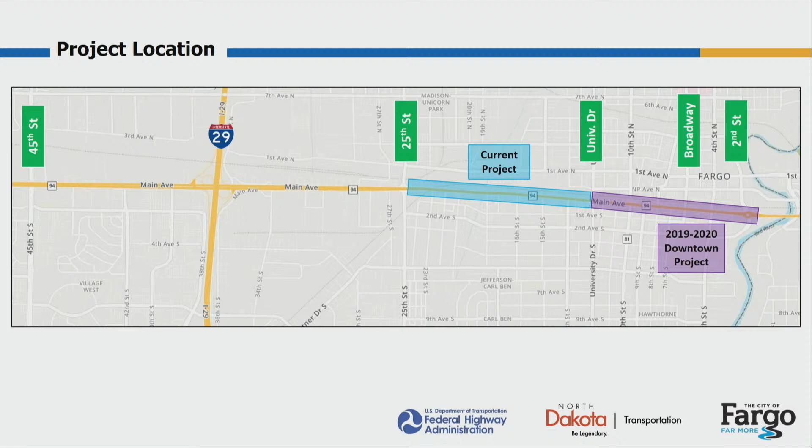I'm not going to spend too much on this slide because I think everybody knows where the project is, but just to highlight that there's 4 miles of Main Avenue, which is also US Highway 10, within the city of Fargo. This is really the last mile that hasn't been touched within the last 10 or 20 years. So this is an important project that has been needed for a while due to some of the needs that are out there. And in purple, the downtown project, which most of you are familiar with, was done just a few years ago as well.

As we look at those 4 miles, one of the interesting things about this corridor in Fargo is how much it changes from one side to the other. West of our project area, between 45th Street and 25th Street, we have a 6-lane section, with 3 lanes each direction. We've got dedicated left turn lanes, sometimes right turn lanes as well. But then when we look to the east, with the project that was just rebuilt a couple of years ago, that section changes from a 5-lane section down to a 4-lane and ultimately a 3-lane as you approach the roundabout at 2nd Street. So this context of the surrounding corridor definitely played into our alternative development with this project.

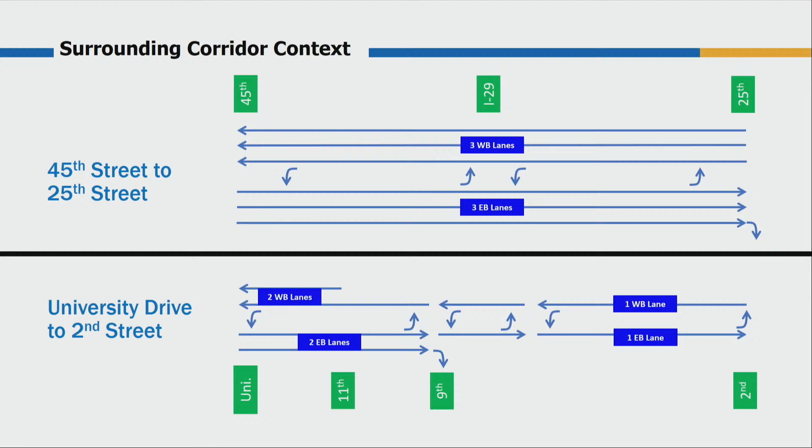The other thing that has been interesting, or challenging, with this corridor is the narrow right-of-way that we have between 17th Street and University Drive. We only have 60 feet of right-of-way available to fit what we're trying to do in that area. And as you can see on the screen, sometimes that 60 feet is literally between building face to building face. So that obviously constrains some of the things that we're able to do as well.

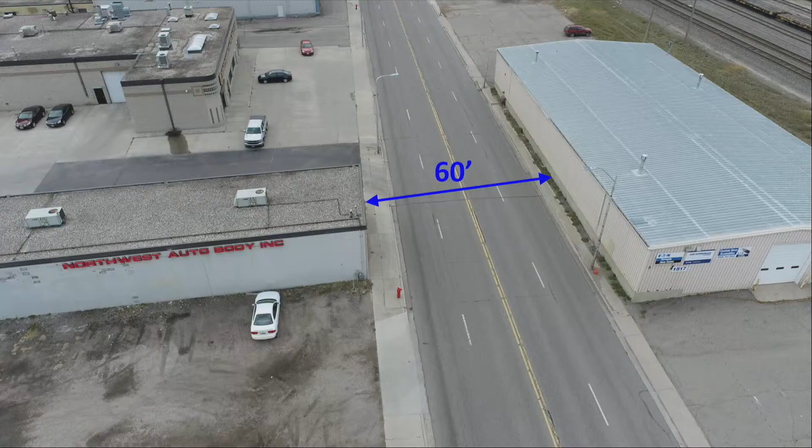Those of you that were here last year, this slide is essentially the same. One of the first things we do on these projects is really work with our team to develop the purpose and need for the project, our why, as far as why we're doing the project.

These bullets really boil down our purpose and need pretty well. A couple to highlight here: bullet number 2, improving the pedestrian environment, has been really important to the project team from day one. I think those of you that have walked out on Main Avenue understand that's something we can definitely improve. The photo on the lower left shows an example of a really tight sidewalk with the building, and the travel lanes right adjacent, with not a lot of room to operate.

And then the photo on the lower right—the other thing we really looked at with this corridor is trying to close and consolidate access. I think there's about 80 driveways within this 1 mile stretch of Main Avenue. We've met with many of you a few times, and we appreciate everybody's willingness to look at opportunities to close some of those. Jake will talk about that here in a little bit on how we were successful, I think, in trying to do that.

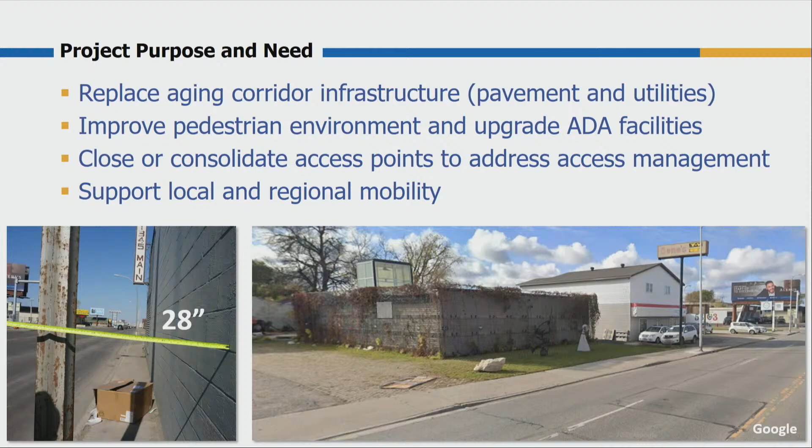On federally funded projects like this, one of the first things we have to do is go through what they call the NEPA process. That stands for the National Environmental Policy Act. It's a process required for federal actions that have federal funding, to make sure we're studying and disclosing any environmental effects or impacts that might come out of what we're trying to do with the project before we make decisions.

There are 3 classes of action for that process. I'll just highlight them here quickly. The first class is called an environmental impact statement. I'd call that the most complex class, where you already know you're going to have significant impacts with what you're doing, so you need to really do a detailed study of what you're looking at.

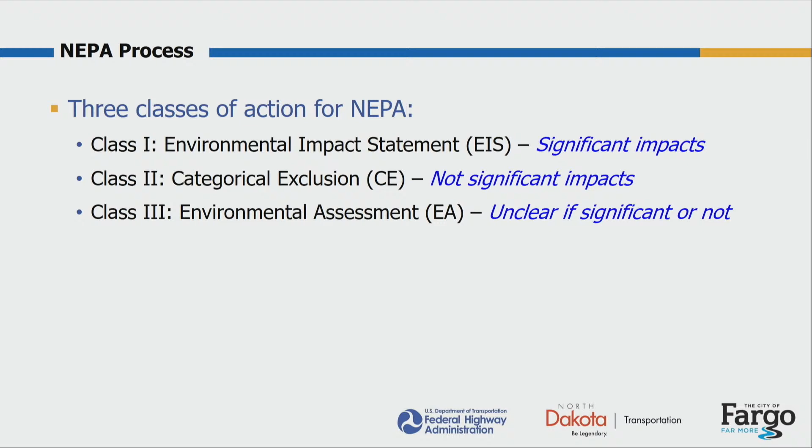Class 2 is called a categorical exclusion. That's probably on the other end of the spectrum—the least complex class, where you're pretty sure you're not going to have significant impacts, so you just start down that track and see where things go. The third class is in between those two: an environmental assessment. That's when you're not really sure if your alternatives or your project is going to have significant impacts or not.

The Main Avenue project we're talking about today started as a class 2 categorical exclusion. When we started the project, we were thinking we're not going to have anything that would elevate to significant impacts. Then as we worked through our alternative development last year, met with a lot of you, and developed our alternatives with our project team, it was determined that because some alternatives impacted buildings and could potentially cause relocations, that definitely would be a significant impact.

So the project team stepped back at that point. We looked at that and said, we need to elevate this environmental process to an environmental assessment so we can look more closely at these impacts. That's really what caused the delay that some of you know about with this project. It added about another year to our project schedule, but I think it's been well worth it because we were able to take that detailed look at some of these things. That's how we got to the environmental assessment.

We started that process in February of this year. FHWA and the DOT were joint lead agencies, with the City of Fargo as a participating agency. We've been working through that, taking a close look at a number of different environmental categories regarding the alternatives and their potential impacts. We made it through that process and were able to get the EA finished and signed by FHWA in late October. So that's why we're here today—now it gets released for public inspection.

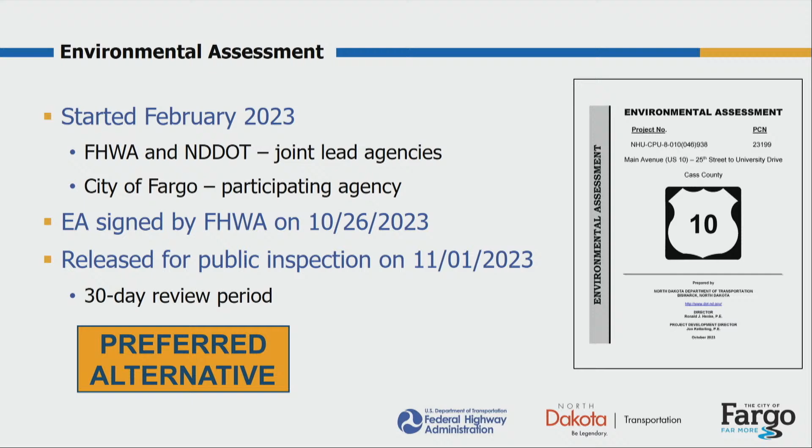So starting to jump into a few of the details here, and then I'll turn it over to Jake for some alternative discussions. One of the first things we had to do with this project is collect traffic data and then figure out how we're going to forecast this data out to 2045, which is our design year. So what we're trying to show in this graph on the left, the year is on the bottom axis, and the vertical axis on the left is the number of vehicles per day, what we'd call ADT, or average daily traffic.

If you focus first on the line that has the blue and the orange, those blue dots represent collected data up until about 2018. So from 2005 to 2018, you can see that's kind of what traffic was doing on Main Avenue—it was growing slowly a little bit every couple of years. That orange line was what we really expected that trend to continue to be as you move forward. But with COVID, of course, everybody knows things kind of changed as far as the way people use a lot of our corridors around town.

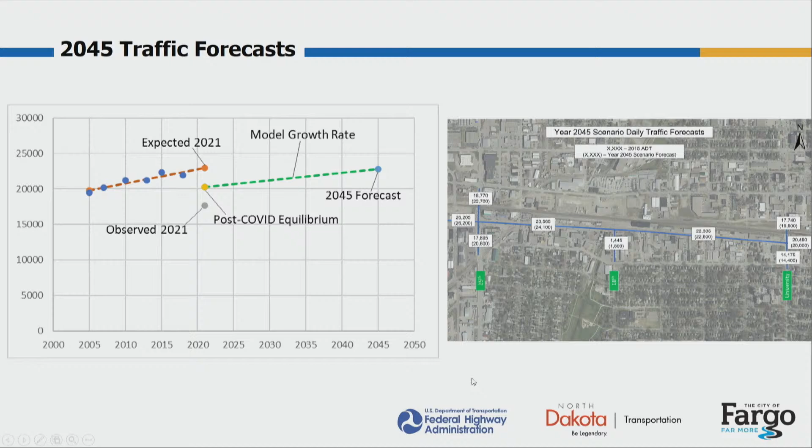So a couple key findings from the traffic analysis: we found that the current through-lane capacity out on the corridor was adequate for that 2045 traffic. We didn't need to add any through lanes to the corridor. In combination with that, as we tested some different lane configurations, we found that we could reduce the lanes east of 18th Street while keeping the same capacity west of 18th Street, and that would still provide an acceptable level of service, or LOS, on the corridor. That really helped inform some of our alternative development as we moved into that part of the project.

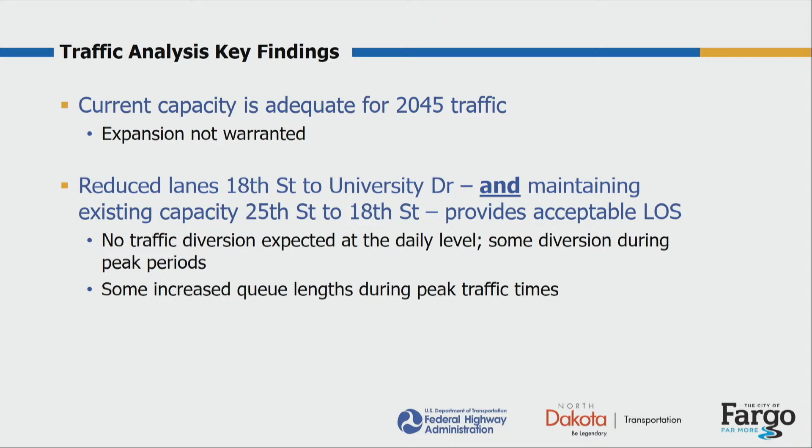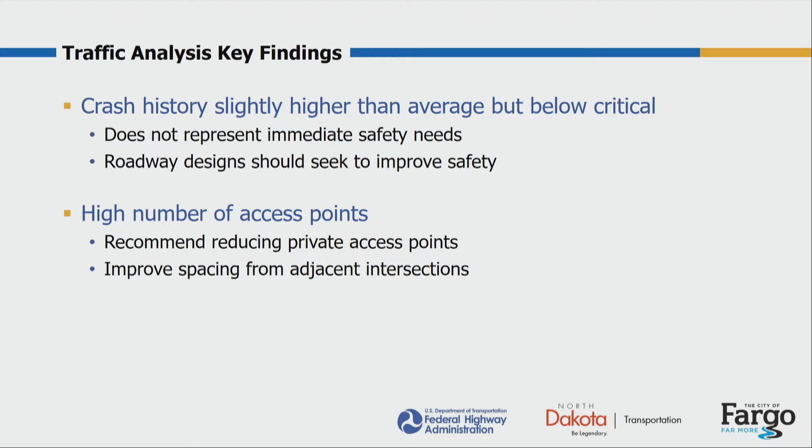All right, thanks Matt. Hello, everyone. Now we're going to talk about the alternative development process, what alternatives were moved forward as part of the environmental document, and really what we're trying to do and achieve with the purpose and need that Matt discussed before was provide some consistency between all the alternatives.

One of them is the segment west of 17th to 25th Street, maintaining that 5-lane section. We determined there was a need there. We have the right-of-way room and capacity to do that. ADA compliance and the improved pedestrian environment with sidewalks, providing a continuous center left turn lane along the entire corridor. Right now, that center left turn lane only exists from 18th Street to 25th Street.

And construct new sidewalk along the entire corridor. Those pedestrian improvements, nearly 8,000 feet of sidewalk will be replaced. Reducing one lane of through traffic in the westbound direction between 17th and University Drive.

And as discussed earlier, that management of those access points. We've talked a lot with the property owners, a lot of you in the room here today, about how we can provide additional safety benefits when it comes to access in and out of properties. And then also as part of this, replacing the storm sewer, sanitary sewer, water main, all those underground utilities with this, as well as improve the lighting.

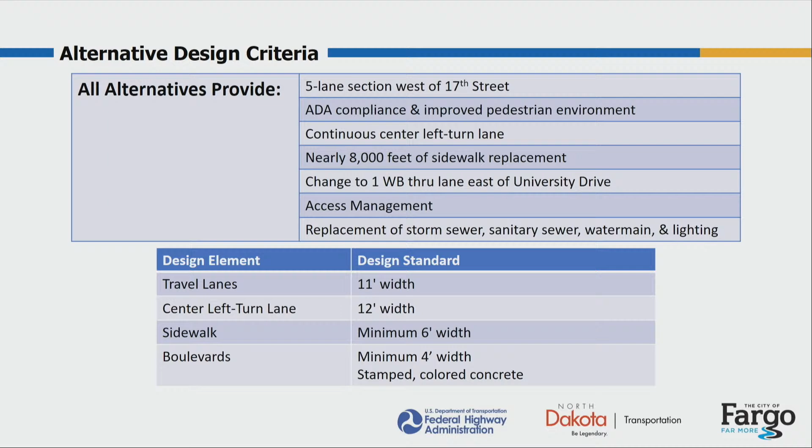So when the project first started, we decided with the changing environment along the corridor with the number of lanes that are currently out there, we decided to split up the corridor into 2 segments: the segment from 23rd Street to 17th Street, and also from 17th to University Drive. For all the alternatives, that segment between 23rd and 17th is going to remain a 5-lane section, and we're just going to improve that section. So really the number of lanes is not going to change between that section, just improvements for pedestrians and other amenities.

Now the segment between 17th Street and University Drive - well, these are where the alternatives are going to be discussed in more detail. Throughout the process, we did determine that one of the alternatives will be removed from consideration because of the amount of impacts it does have, and that was continuing that 5-lane section from the west all the way to University. So that was removed, and it was determined as part of the environmental process to move the following alternatives forward.

We did add an alternative. It's more of a modification of one of the alternatives, and it's really to minimize some of the impacts that alternative originally had.

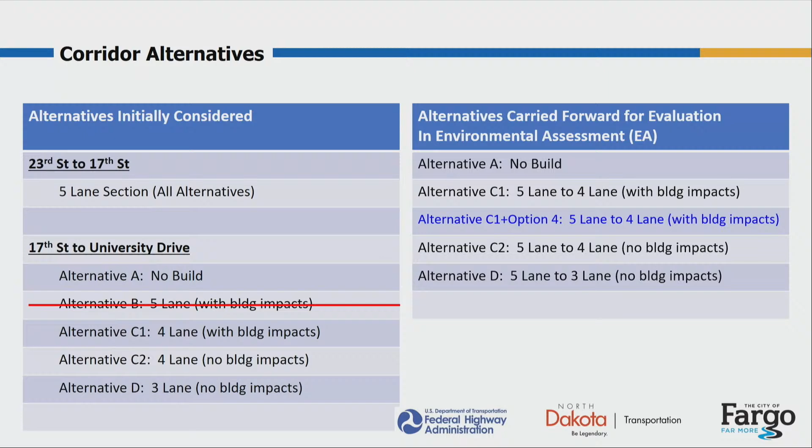So the alternatives that are going to be moving forward through the environmental process: Alternative A is a no-build, basically that is a do-nothing - project doesn't happen, no improvements. Alternative C is a 4-lane alternative. Remember, these are all alternatives between 17th and University.

That 4-lane alternative was broken out into 3 separate sub-alternatives for that 4-lane option: one with building impacts, one with shifting an alignment slightly to the south to avoid some impacts to some buildings, and also modified design criteria that we talked about previously that would eliminate those building impacts. And then lastly, Alternative D was a 3-lane.

We also looked at some options at specific locations along the corridor. Option 1 was widening the sidewalk from 23rd to 25th Street. This would provide some continuity with the sidewalk and the network for bicyclists as well, on the south side of the corridor. Option 2 is to provide a raised median at 17th Street. And option 3 was to reconstruct curb lines with that reduced lane just to the west of University.

What's been recommended by the project team and the stakeholders was to move forward with recommending a preferred alternative of alternative C2, which is the 4-lane with modified design criteria and no building impacts. And then for the options, option 1 with that widened sidewalk at the west end of the project, as well as option 3, reconstructing the curb line just west of University Drive.

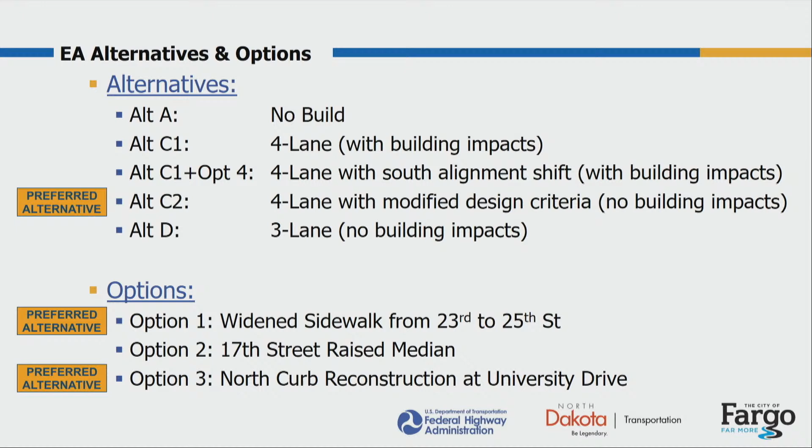So a little bit in detail on the alternatives. Alternative A is a no build. Like I said before, no improvements, the project doesn't happen. No improvements along the entire corridor. We have to move forward with this as an option to consider as we look at all the impacts and evaluation of the alternatives.

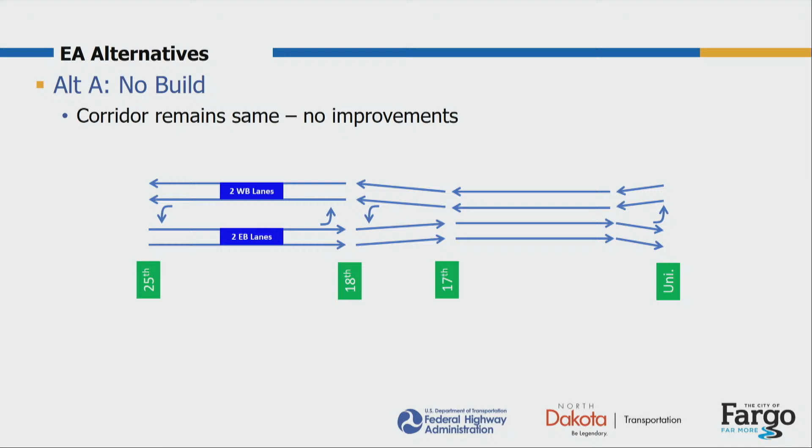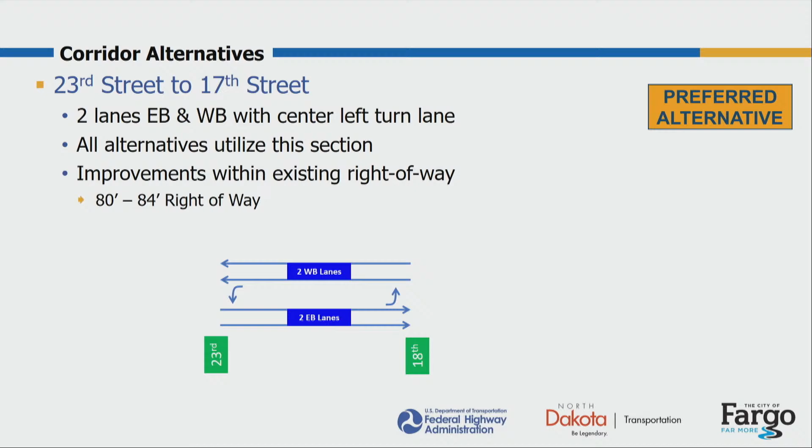The segment between 23rd Street and 17th Street was selected to move forward as a recommendation. This is the only alternative really for this segment, which is to reconstruct the current segment, maintaining those 2 lanes in the eastbound and westbound direction with that center left turn lane. Also, all improvements along this corridor between 23rd and 17th will be constructed within the existing footprint of the right-of-way, so no widening of the existing right-of-way. Here's a cross-section of what that will look like. Again, 5-lane section, widened sidewalk and boulevard improvements, and also some replacing of some amenities, all within the existing right-of-way.

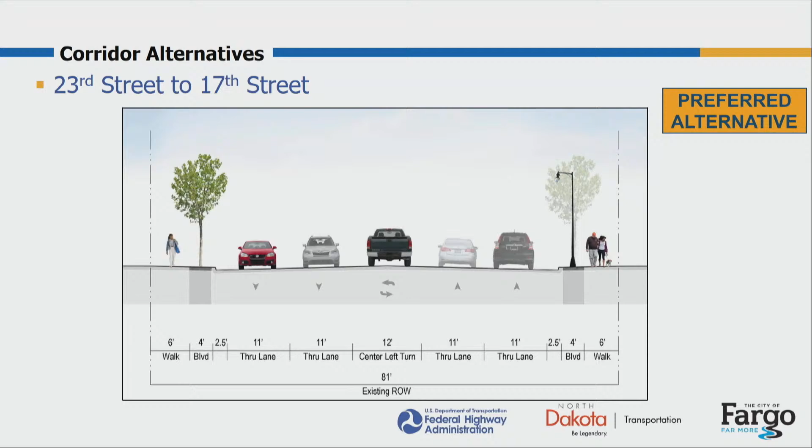We're going to show visualizations of each of these, just a quick snapshot of it, just to get that picture of what it could look like. We do have extended versions of these that go along the entire corridor at the tables there on the monitors, if you wanted to take a closer look at other areas that may not show up on this short clip.

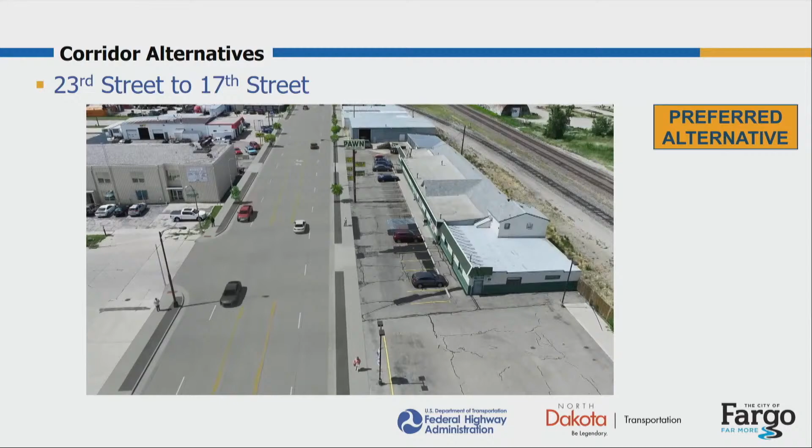So as you can see, around 21st Street here, it's very similar to what it looks like today, with just some of those widened pedestrian improvements and reconstruction of those sidewalks. The roadway will be reconstructed but put back with a 5-lane section.

Alternative C1 - now Alternative C are all 4-lane alternatives, but Alternative C1 is a 4-lane with that ultimate build design criteria, which in turn resulted in building impacts. There will be 2 eastbound lanes, 1 westbound lane, and then that center turn lane. Out there today, there are 4 lanes currently in this segment, but it's 2 lanes in each direction with no center left turn lane. So we're going to take one of those lanes and turn it into a 2-way left turn lane.

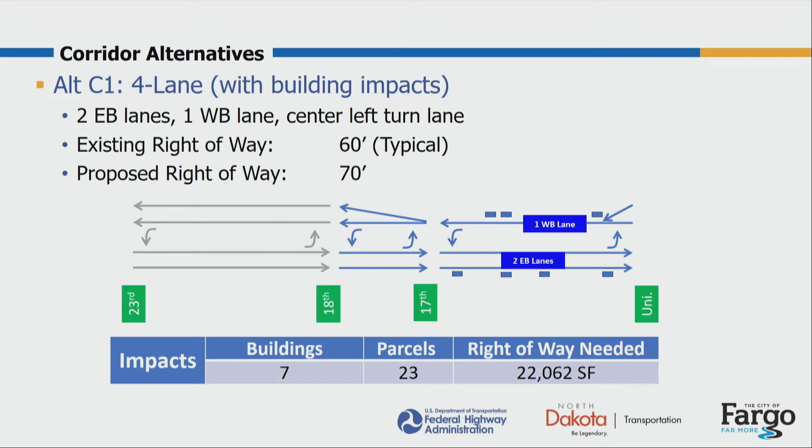Existing right-of-way out there is 60 feet, typically varying plus or minus just a little bit. But with the proposed improvements, with the widened sidewalk and corridor, a new right-of-way width of 70 feet is proposed. With that, there are 7 building impacts, and the right-of-way needed for that additional 5 feet on each side is what we're going to be requiring for additional right-of-way to have that wider footprint.

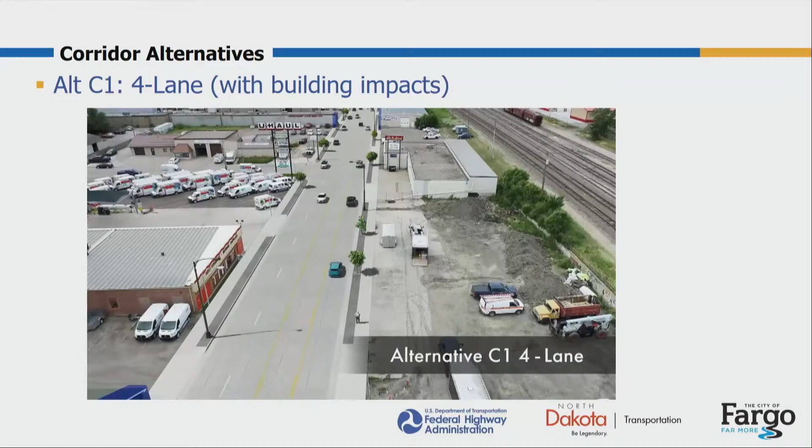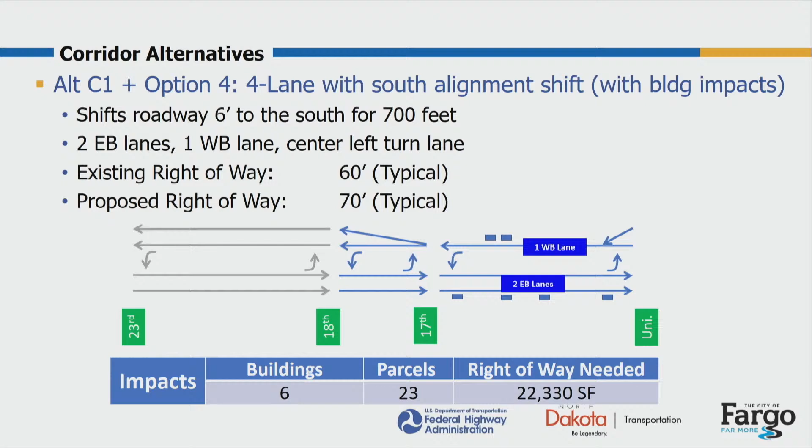Alternative C1, option 4 is still maintaining those desired widths for sidewalks, lanes, as well as boulevards. Same right-of-way width, same lane configurations. There is going to be a 6-foot shift from the roadway alignment to the south to avoid one of those building impacts to those buildings. So that's what this cross-section represents. That building is not impacted, but additional right-of-way or additional width on the other side of the roadway is going to be required.

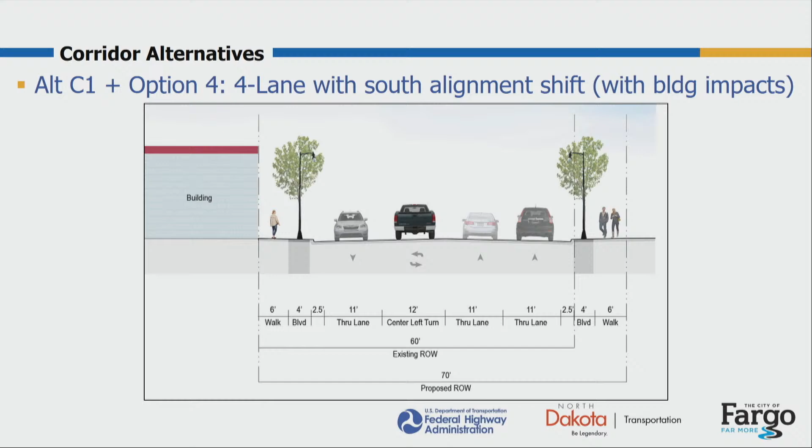We don't have a visualization for this one, but we are showing a plan view that shows that shift towards the right side there. It shifts towards the south, missing the building, and then comes back as you go to the left of the page. The alignment comes back to the normal alignment along the corridor. So the shift only happens in this short area. But you do miss the building, though the impacts to the south are greater from a right-of-way need as well.

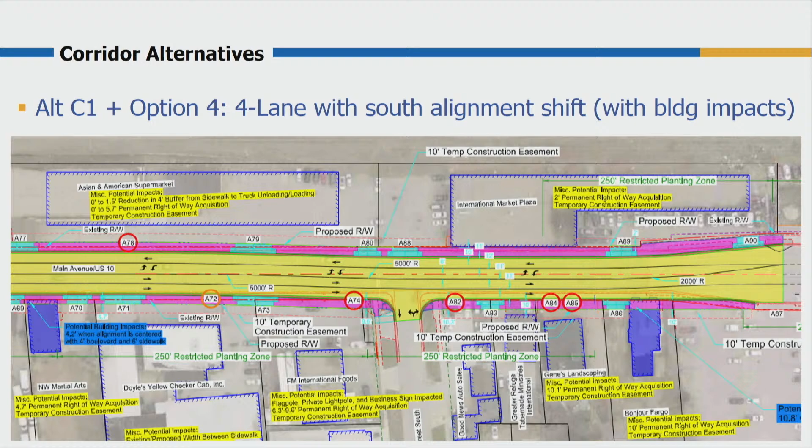Alternative C2 is a 4-lane section, same lane configuration with 2 eastbound, 1 westbound, and a center left turn lane. This is going to be with modified design criteria, so we're not going to need as big of a right-of-way footprint. It's 60 to 68 feet compared to the 70 feet of alternative C1.

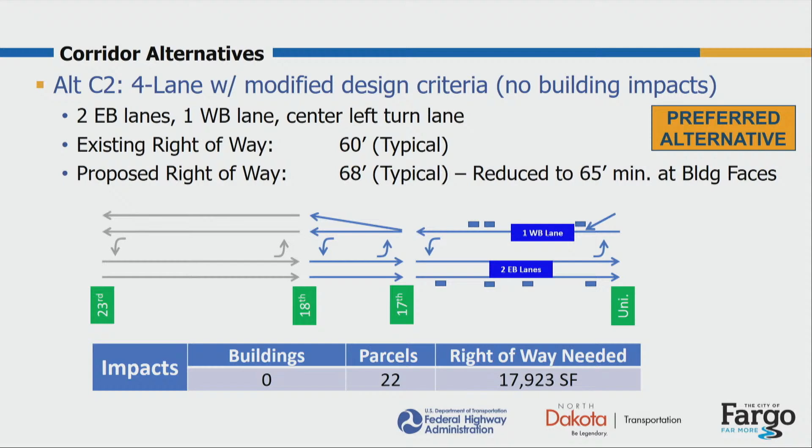No building impacts as part of this one, and I'll show you the changes to those design criteria. This is the recommended alternative that has been preferred to move forward.

The modified design criteria: lane widths will be narrowed slightly, going from 11 feet to 10.5 feet. The center left turn lane will be narrowed from 12 feet to 11 feet. The sidewalks adjacent to buildings, only at the building locations, that minimum 6-foot sidewalk will be adjusted to 5 feet. And the boulevard width, that minimum 4-foot will be adjusted to 2 feet, so it'll be 7 feet instead of the 10 feet for alternative C1.

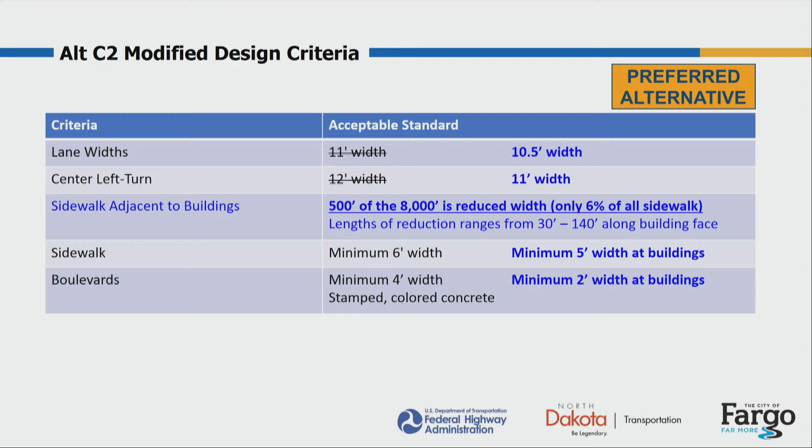This only occurs about 500 feet total along the entire corridor, just where those buildings are right up against the right of way. To avoid those impacts, this modified design criteria for the sidewalk and boulevards will occur. I'll show you that on the cross section here and then also on the visualization.

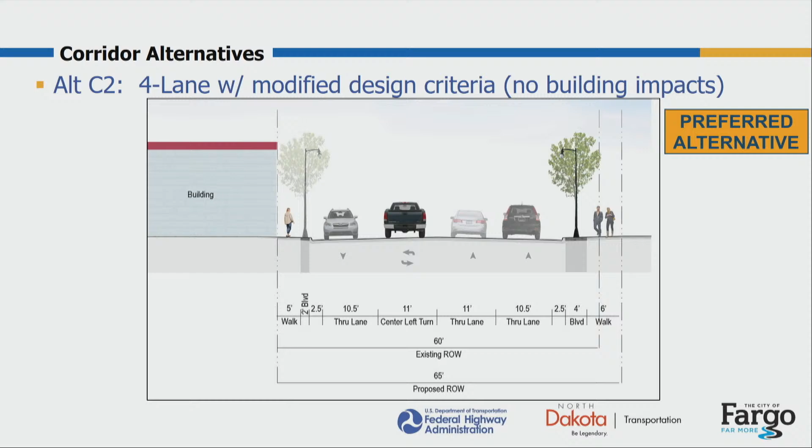Here you're showing that 5-foot sidewalk with the 2-foot boulevard on the left, right adjacent to those buildings. But on the other side, we're still meeting that desired 4-foot boulevard and 6-foot sidewalk. And also with the lane configuration, the widths are slightly reduced.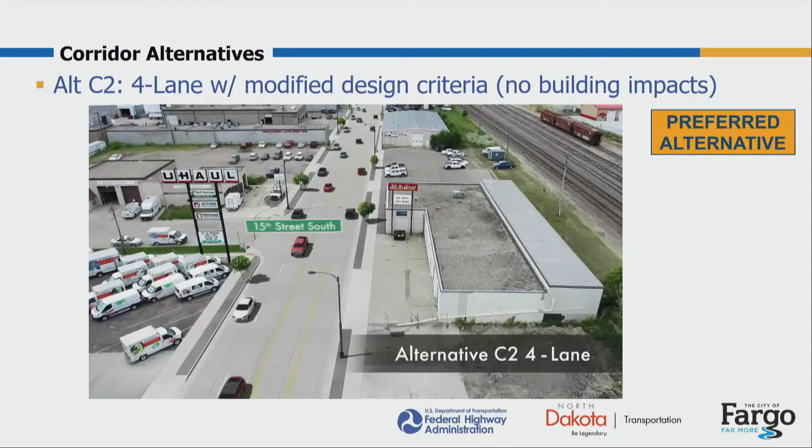So at the top of the screen, as I run this, you'll see what that modified sidewalk section looks like, where you can see it narrows up a little bit on the boulevard and sidewalk widths at the top of the screen there. Again, those only occur at the building locations.

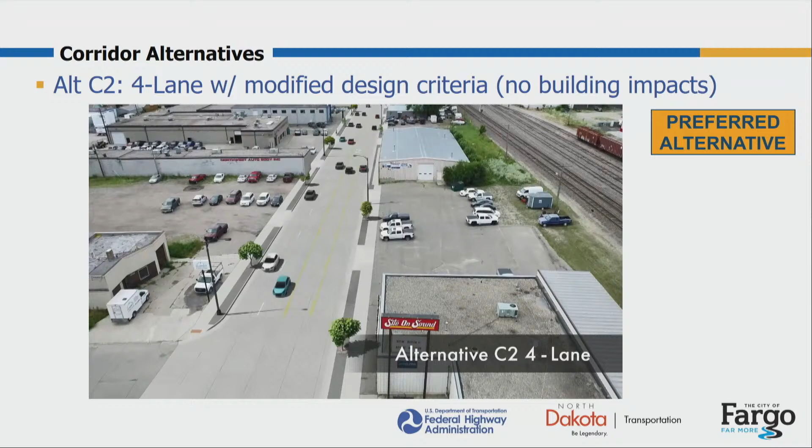The last alternative was a 3-lane section, alternative D — one eastbound and one westbound with a center left turn lane. The eastbound lanes, as you remember from the other alternatives, have 2 lanes, so there will be a lane drop at 18th Street, which is the signalized intersection. The existing right-of-way width of 60 feet will be maintained, so there will be minimal right-of-way impacts along the corridor.

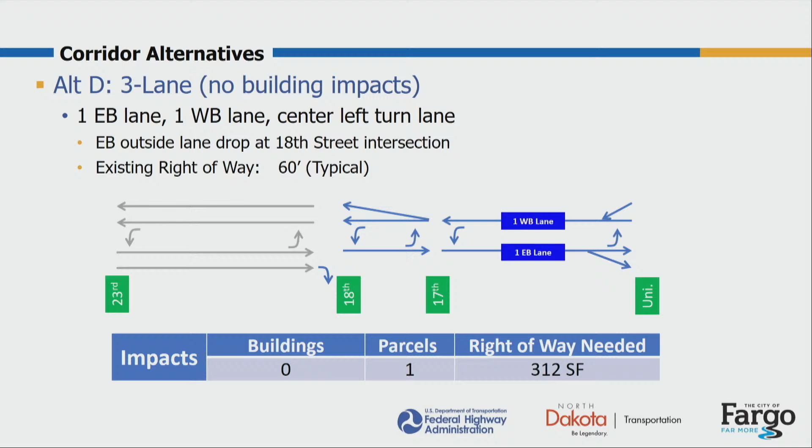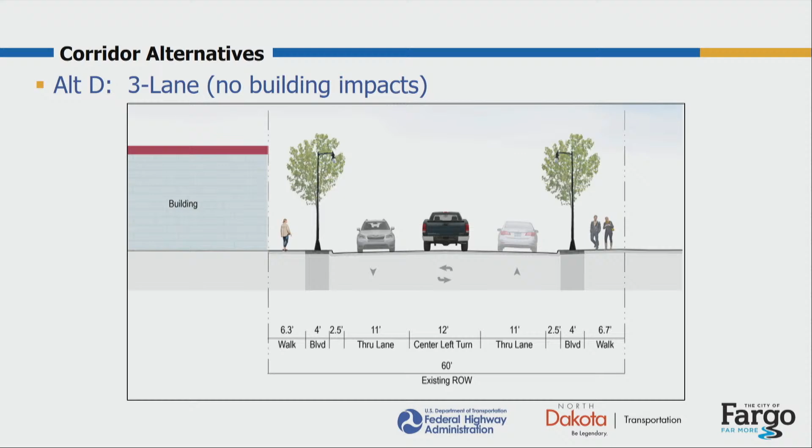Most everything will be able to be built within the existing footprint with this 3-lane alternative, and as a result you get a little bit bigger sidewalk width and boulevard. You have one less lane, and that's what this alternative looks like on the visualization — one lane in each direction with the center left turn lane, and a little bit wider sidewalk widths for pedestrians.

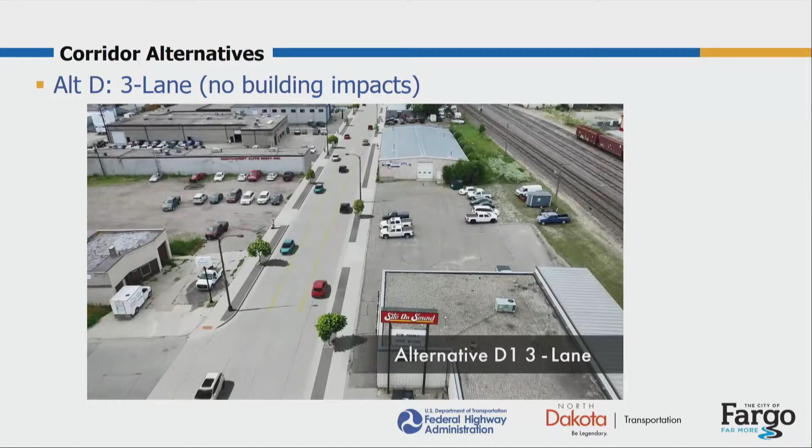We show here some examples — these pictures were taken on the Main Avenue corridor that was reconstructed here a couple of years ago. It just shows what this new section of corridor will look like.

One really good representation of alternative C2, which is the recommended alternative: that picture on the left is 7.3 total feet, which is very similar to what that would look like in front of those buildings as part of alternative C2, a 5-foot sidewalk and 2-foot boulevard. As you go further to the right, meeting more of those desired sidewalk and boulevard widths with the wider 6-foot sidewalk, 4-foot boulevard.

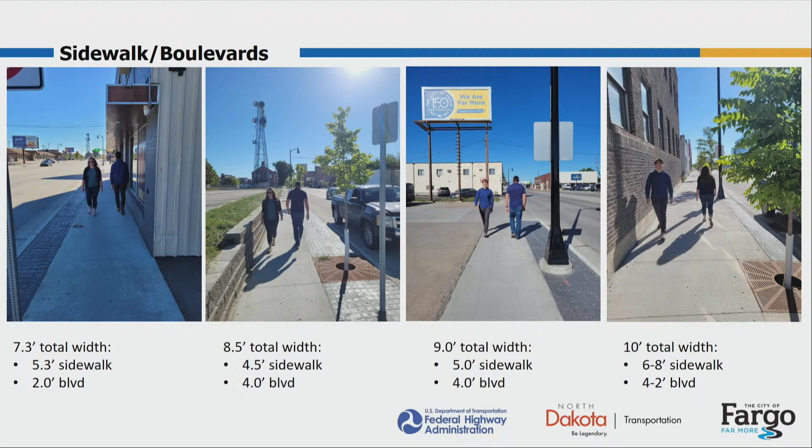We'll also be looking at any streetscaping opportunities, whether that's tree plantings in the boulevard or planting beds where there's opportunity to do that. We'll also be looking at parking lot separation, if that's a desire, to separate parking spaces that may abut right up against the sidewalk, to provide a bit more safety and separation between the pedestrians and the parking lot. We'll be working with property owners on opportunities to do those as well.

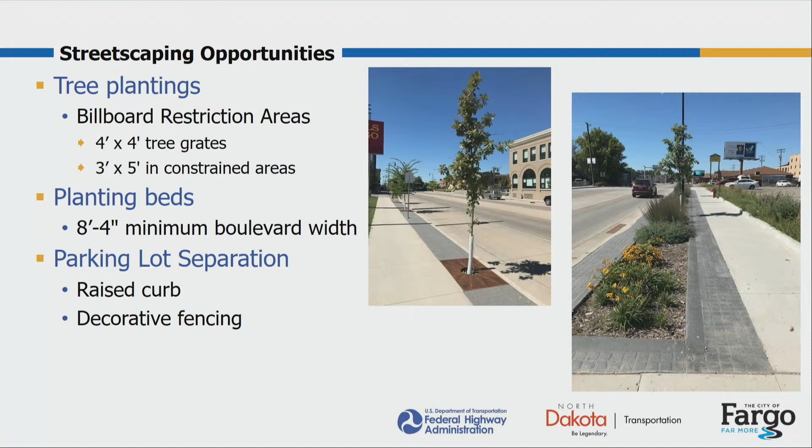So in summary, on the alternatives, here's a table that shows what those impacts are. Alternative C1, both the 4-lane and the option 4 with the shift, have building impacts, a larger amount of right-of-way need, and also more impacts to signs, private signs, parking lots, and the number of properties that may be impacted with some encroachments.

Alternative C2 is the recommended alternative. No building impacts, but it does require right-of-way from the adjacent properties for that widened sidewalk width.

And those will be done in strip takings. Alternative D has really not much right-of-way impact or impacts to any buildings, since we are removing a lane for that alternative, we're able to build within the existing footprint.

Access management: we have approximately 80 driveways along the corridor. We've talked with a lot of you in the room about opportunities, and we've confirmed that about 24 could close along the corridor, with potential further conversation on approximately 7 more. If all those move forward with modification, either closure or consolidation, we're looking at a 39% reduction in total access points along the corridor.

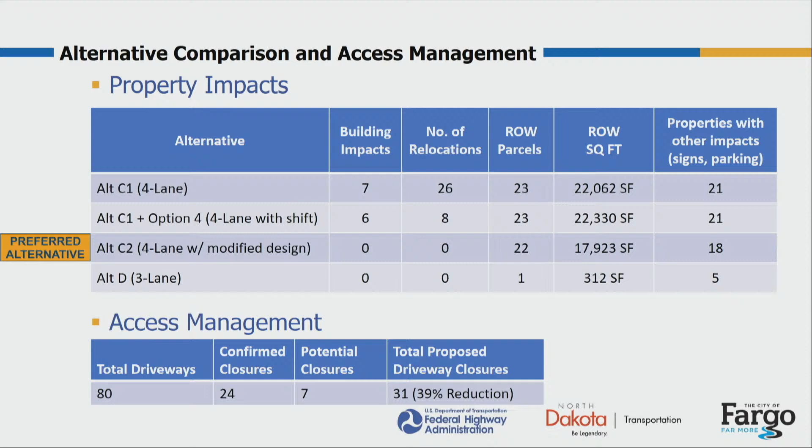The options here are strictly in certain locations and can be applied with any of the alternatives.

The widened sidewalk from 23rd to 25th, at the Simonson Lumberyard on the south side, provides more connectivity and safety for pedestrians and separation from oncoming traffic. It ties into the future bike lane plans to the west and provides connectivity between corridors. It also improves the crossing over the railroad spur line, providing a better angle to cross those tracks so wheels such as bikes or wheelchairs don't get stuck in the track lanes.

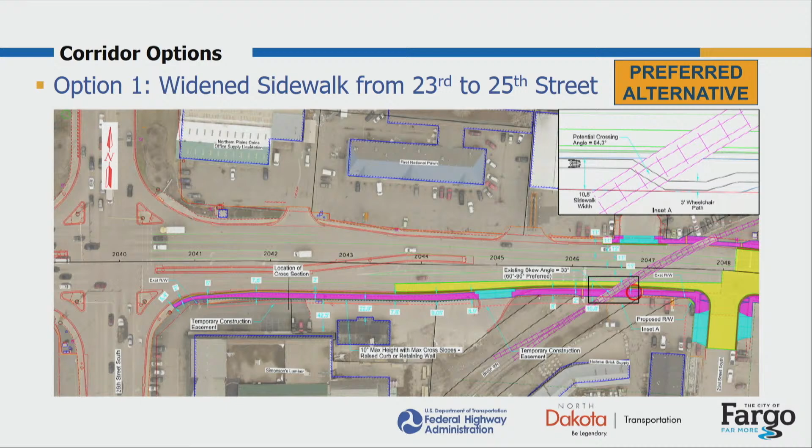Raised median at 17th Street. This would prohibit left turns in and out of 17th Street. With the proximity of this so close to 18th, which is signalized, this option removes any left-turning and conflicting movements. This alternative was not recommended to move forward by the project team.

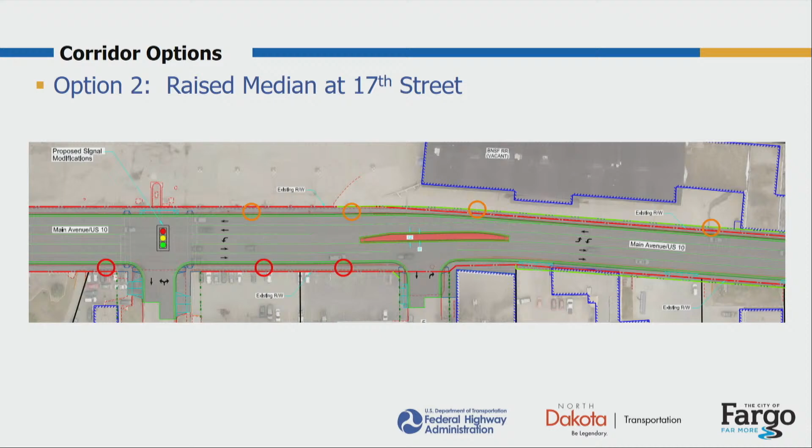Option 3 is the reconstruction of the north curb line. Towards the University Drive intersection, it's just moving that existing curb line out further into the lane to delineate that one lane of westbound traffic a little better.

On the east side of University Drive, for those familiar with it, you're coming from a 3-lane section, or one lane from the east, that does develop into a through lane now because there are 2 lanes currently on Main Avenue. But that lane that develops will stay a turn-lane only to go onto the counterflow lane on University. So there won't be a lane developed from the east; it'll just develop into a turn lane.

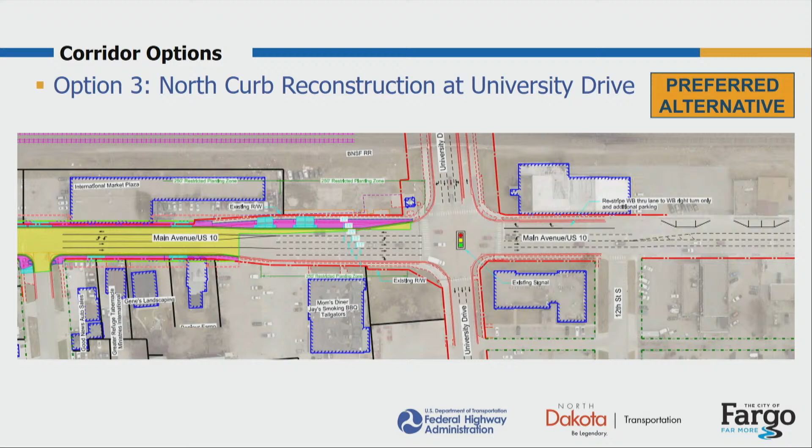All right, Matt will now discuss some of the project funding and other items.

Thanks, Jake. I promise we're getting close to the end here. We're almost there, so hang with us. So with that exciting discussion about cost and project funding, how are we going to pay for all this stuff and how much is it going to cost?

What I'll highlight on the screen is the first column: the engineering and construction costs for all 4 alternatives are really pretty similar, since the footprint isn't too different from right-of-way line to right-of-way line. But where you do see some difference is in the second column, with land acquisition and building impacts. Alternative C1 and alternative C1 plus Option 4 have those building impacts requiring relocations and full property and building purchases, so they end up quite a bit more expensive than the other alternatives, as shown in the totals in the third column.

And these are 2026 dollars that we inflated these costs to.

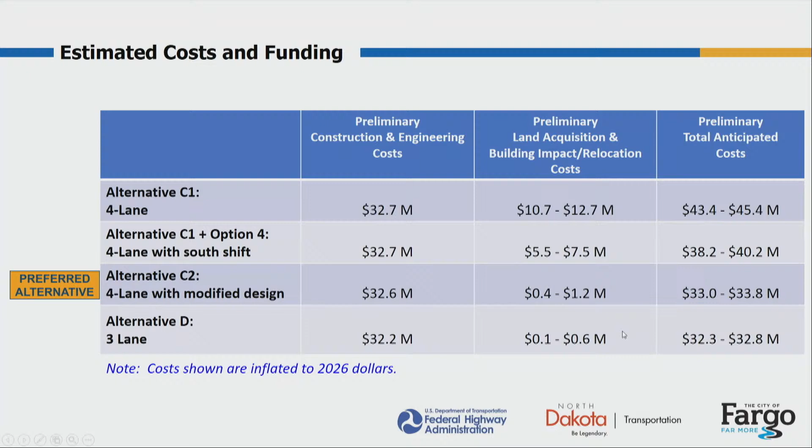Another item of interest to many of you as property and business owners is something we call encroachment. When we have federal funding on these projects, we have to look at whether anything is encroaching on the right-of-way. That could be parking, but a lot of times it's just signs and awnings. That's what we see on this corridor, where you have a sign overhanging the right-of-way.

So we went through and did that, and there's 49 of them on the corridor, so there's quite a few. We will be working with those of you that have those through the next year and a half as we work through that design process. The goal is to try to permit as many of those as we can with the DOT, meaning you'd be able to leave it in place, but the DOT would do a permit with you as a landowner or business owner. That's definitely the goal, but I can tell you that there are some that will need to be relocated. We have information on that, and if anyone has any questions, we can look at that with you here after the presentation.

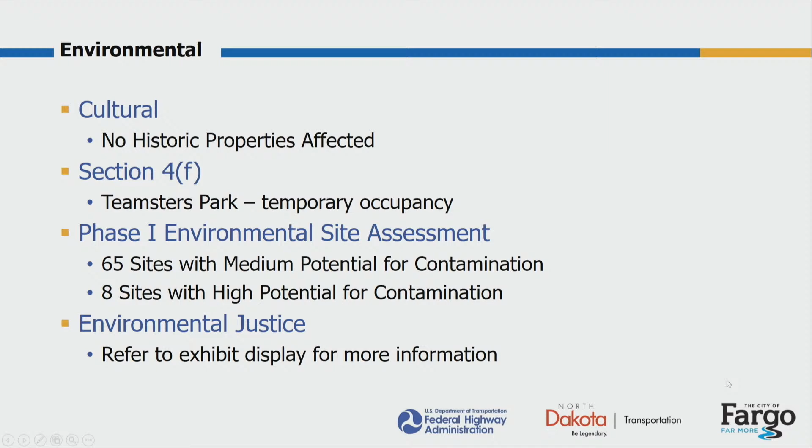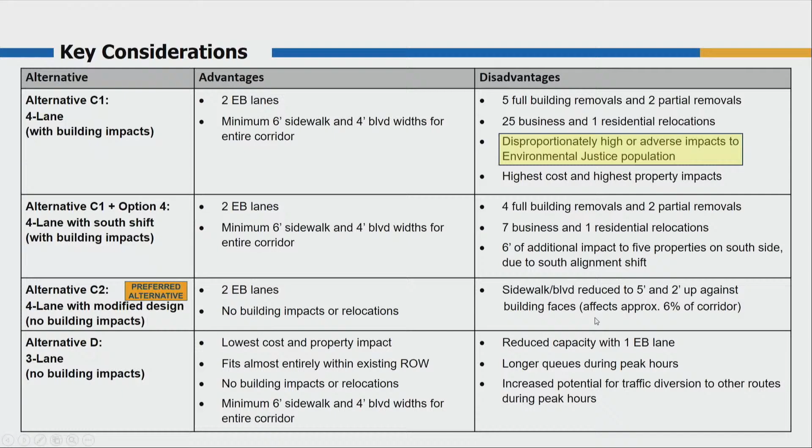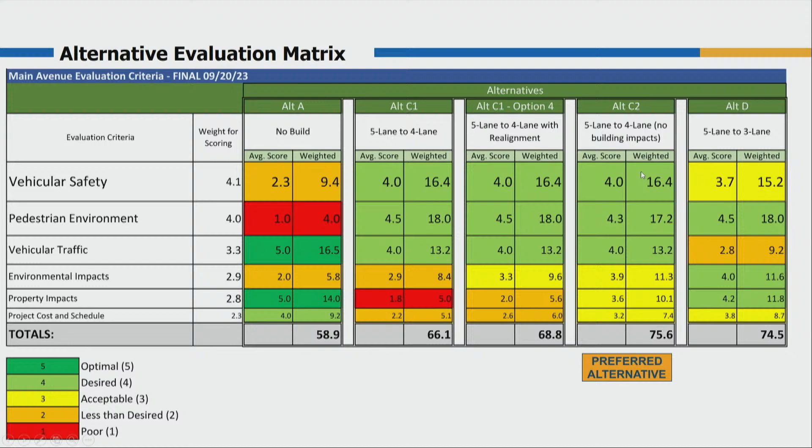The goal is to take through traffic out of the work zone, so we want to detour through traffic using First Avenue North, and also use a truck detour to get some of the large trucks out of there that are just traveling through. But most importantly, we are going to maintain business access. We understand the importance of that, and in one way or another, we're going to make sure that access is maintained during construction.

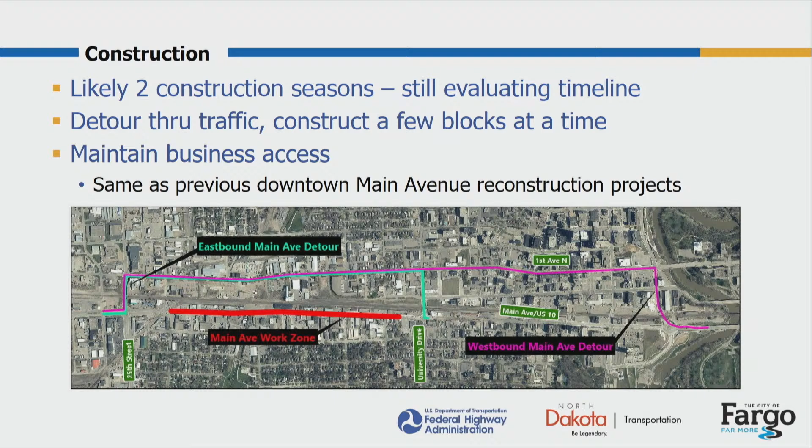What we'll do is take all the public comments received and compile those, which gets included in something we'll send out to the entire project team. We'll meet in mid-December and review all the public comment we received so that FHWA can factor that into the next step. Hopefully early next year, January or February, FHWA will be issuing the final determination on whether we've reached the end of this environmental process—whether we have a finding of no significant impact with the preferred alternative, or whether we need to continue more environmental analysis. That's kind of where we're going over the next few months.

Assuming we do receive a finding of no significant impact early next year, that'll kick us into the final design and right-of-way acquisition phase of the project. That'll be over the next year and a half, and there'll be a lot of contact with those of you who own property or businesses on the corridor. We'll continue to work with you, whether it's access locations, widths, or property we might need to acquire. Right now, tentatively, we have that scheduled to finish in late summer of 2025, with construction starting in spring of 2026. Again, these are tentative and subject to change.

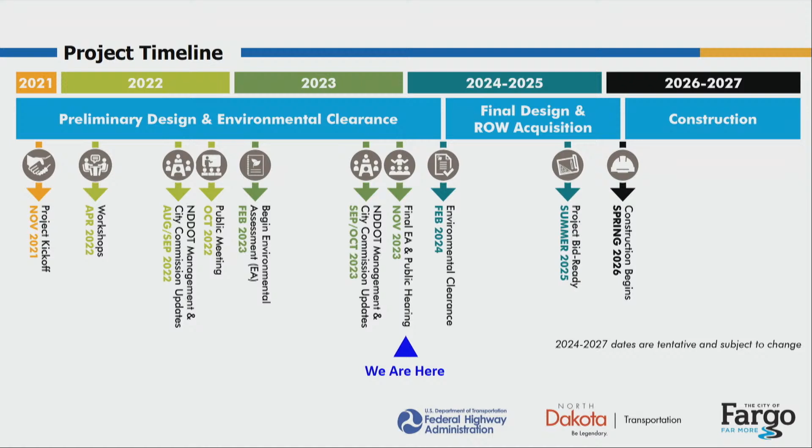Okay, we made it. Who wants to...